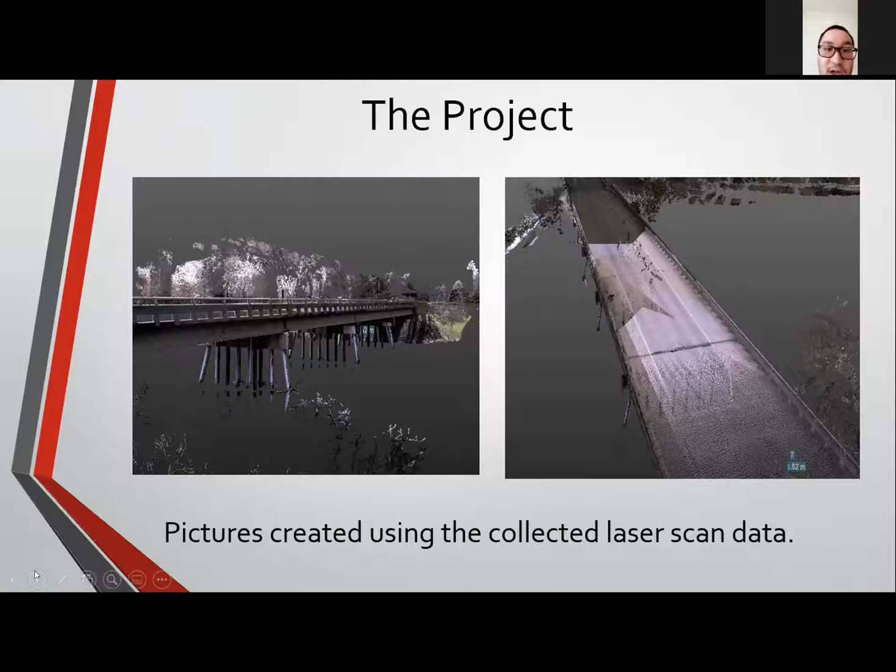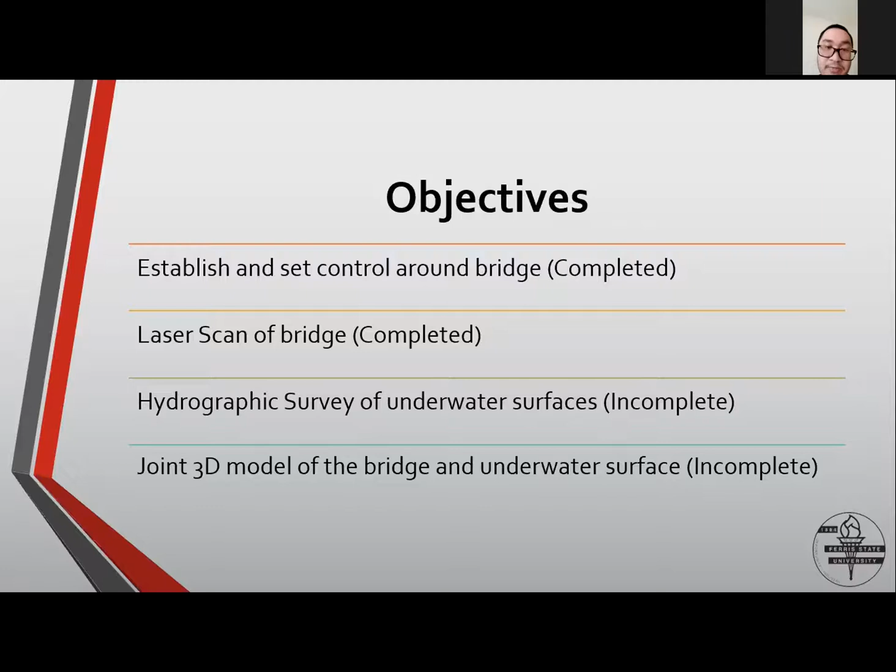For our original objectives, they were to establish and set control around the bridge, which we were able to complete. The laser scan of the bridge and all the surface areas that were above the water, which we were also able to complete. And then the other objectives were the hydrographic survey of underwater surfaces, which was left incomplete, but we did attempt. And then there was the joint 3D model of the bridge and the underwater surfaces, which was also left incomplete. Next slide, please.

Cost estimate. For the costs, we had the scanner fee for $5,000, the hydrone fee for $3,000, a professional surveyor fee for $500, labor fees, $1,440. Traveling cost was estimated to be $130. A processing fee of $650, and miscellaneous costs of up to $1,000, totaling to $11,720 total for estimated budget.

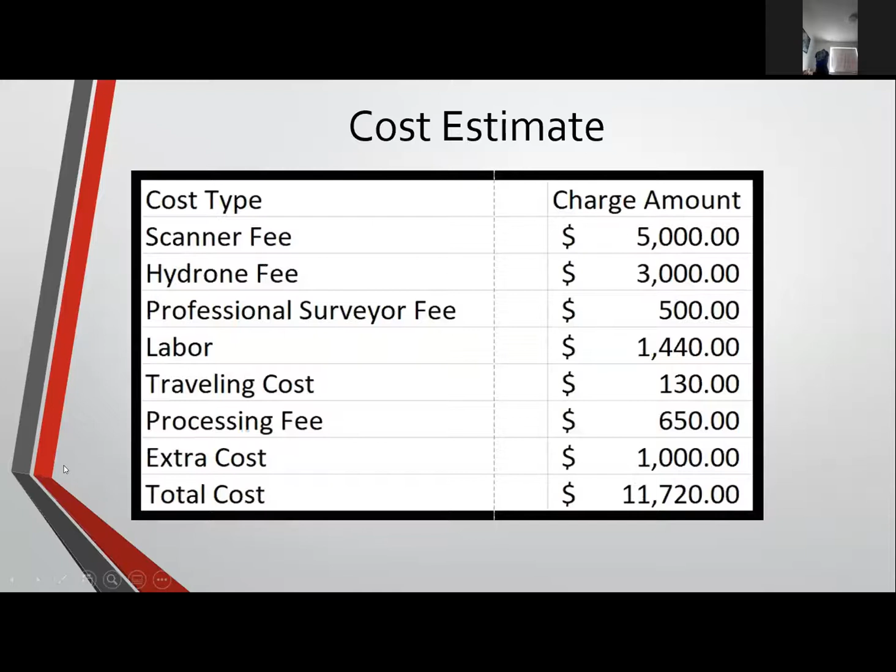If this were to be a real survey group and we were to have to pay for our own equipment, I believe that we were very well within our budget. So yeah, next slide, please.

Time allocation. For establishing control, we had 1 or 2 trips planned, and it took 2 trips to establish control. We first went out there to find where we wanted to place the points, and then to actually place the points. Scanning, we originally only had 3 trips planned, but because we were trying to learn the equipment and use it better and more efficiently, it actually took 5 trips to complete.

For hydrographic survey, we only planned for 1 trip using the hydrone, but that initial trip was unsuccessful due to multiple complications with the equipment and just unfortunate outcomes. And this was left incomplete due to the COVID-19 outbreak, and the 3D model could not be completed because we did not have access to the software or the underwater data.

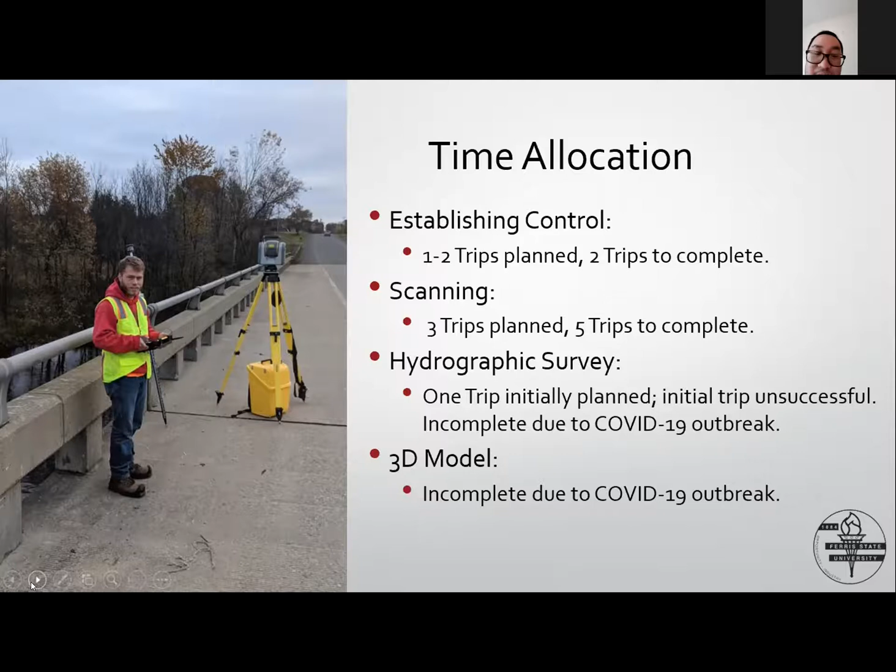So next slide, please. The first portion of the whole Capstone project was the scanning. We did a total of 10 scans. We used the Trimble SX10, and a tool that helped us along doing the project was a polygon tool. And the target that we used was the Trimble multi-track target. And we got it to be within a thousandth of a foot.

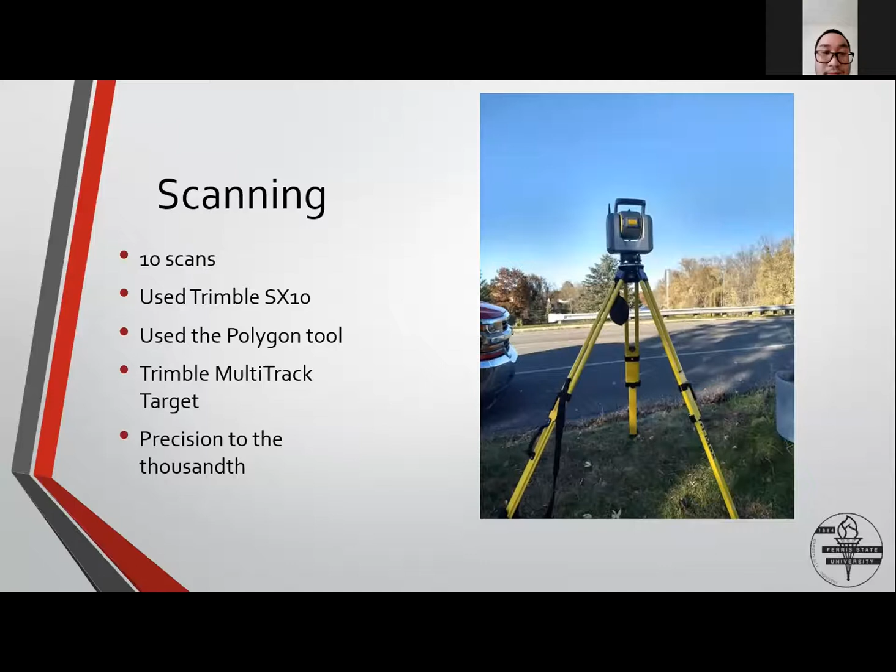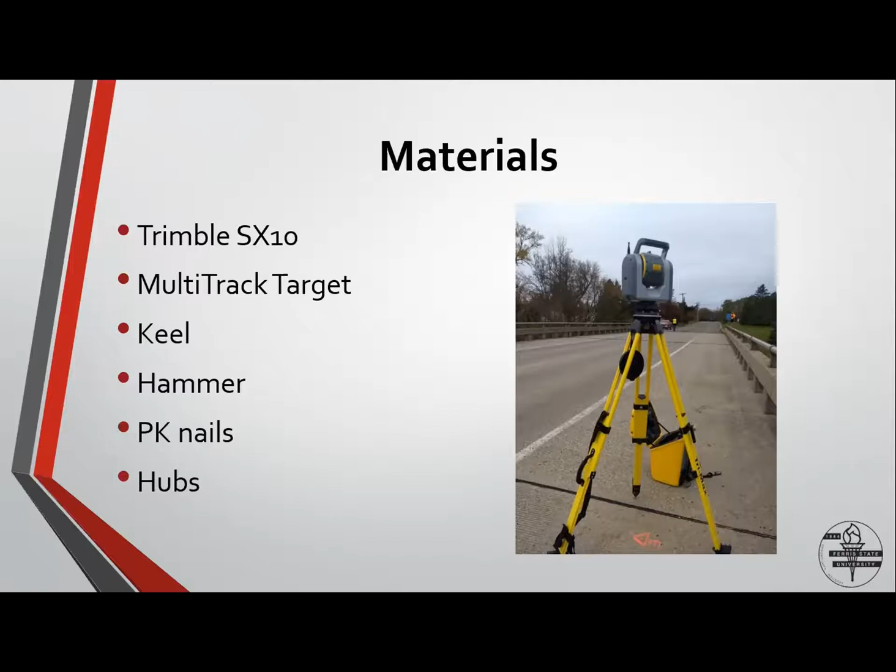The instruments was the Trimble SX10. The target that we used was the multi-track target. The materials that we used for the different control points were the keel, the hammer for the PK nails, and the hubs.

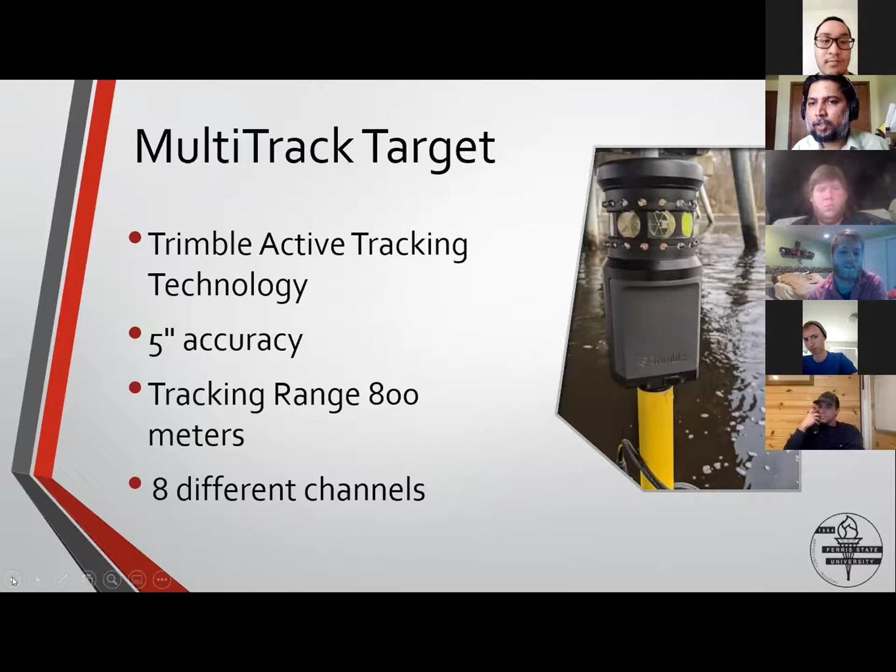Devon, wait a minute. David and everybody else, can you mute yourself and let only him speak. And when it's your turn, you can unmute yourself. Otherwise, there is a lot of background noise that is coming in.

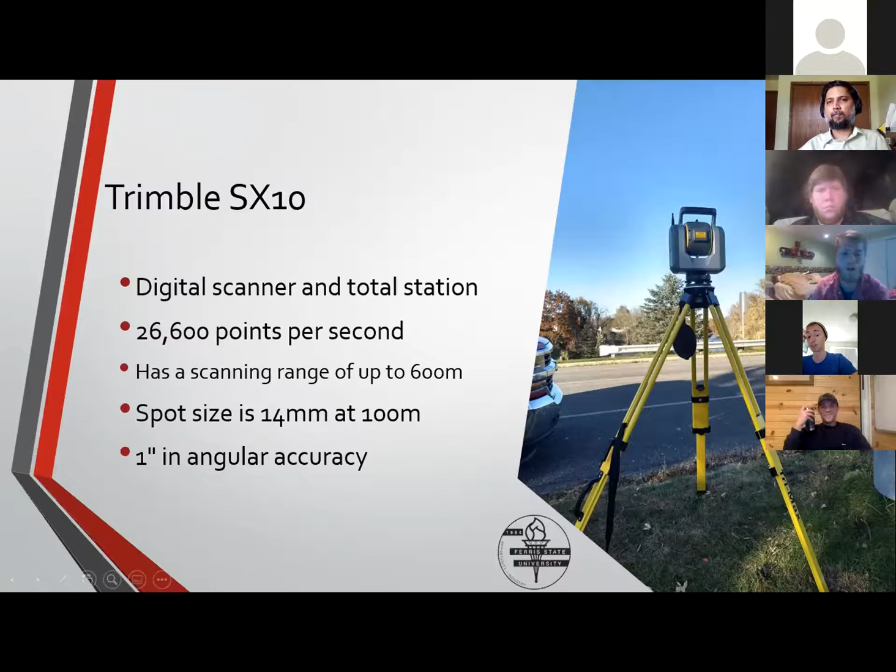You can carry on. All right, so the Trimble SX10, it's a digital scanner with a total station. It's capable of shooting points as fast as 26,600 points per second, and it can shoot points as far as 600 meters. And when you shoot a point at 100 meters distance, the spot size is 14 millimeters, and the angular accuracy is within like 1 second.

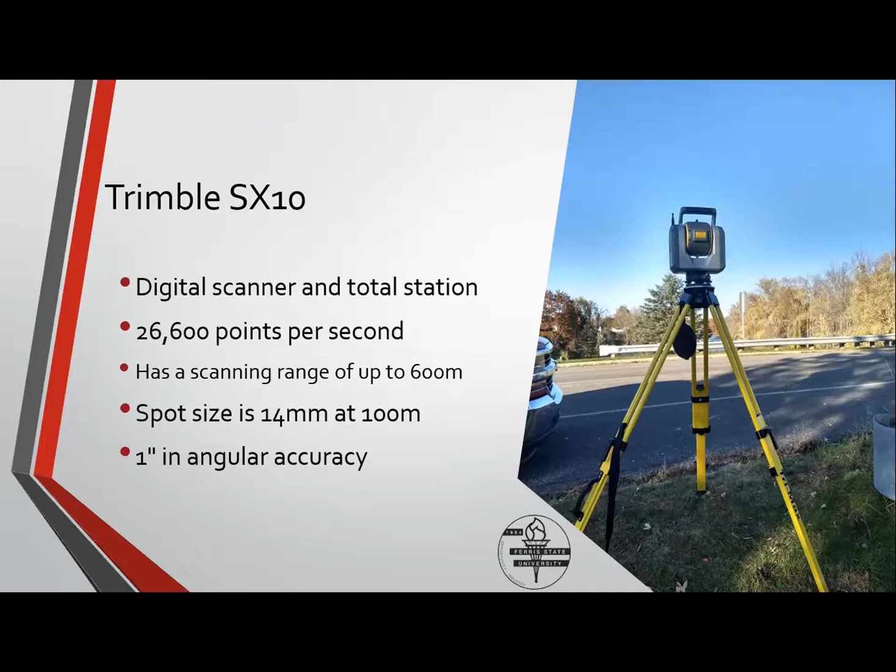It can be tracked as far as 800 meters, and it has 8 different channels, which is helpful when you're trying to use different instruments on the same target.

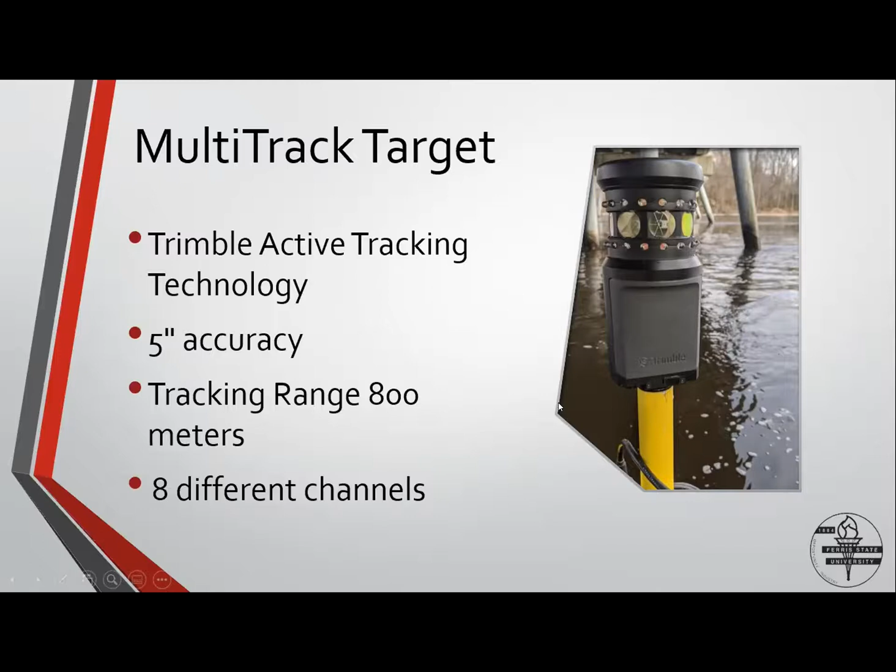Yeah, the next one. Okay, on the first day we set up control. We used 10 control points. I think we had like 2 or 3 on top, and then like 7 were on the bottom. We had to use a local coordinate system because the first total station could not reach that far, so we had to use the first point as 5,000, 5,000.

We had 10 scans on the top and the bottom of the bridge. On the first day, we did use the dome tool, but we decided that we got too much data, and it took almost an hour. So then we learned about the polygon tool, which lets us select the area of focus that we want to scan, which was very efficient. We use Trimble Business Center to process the data.

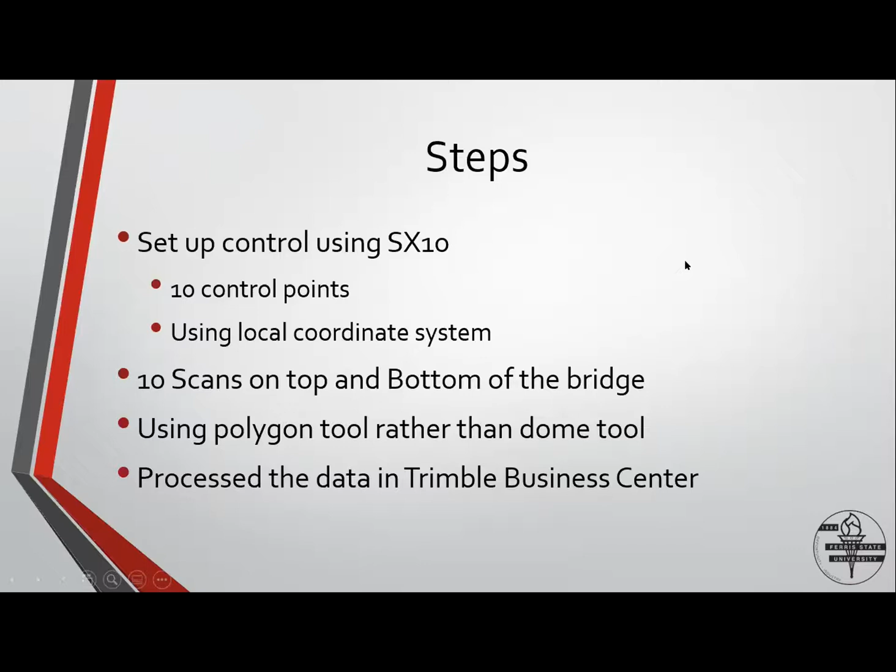Next one. The scanning for the control points, we had again 10 points, top and bottom. We used the hub and nail only on the first point when we had to set it in the ground when the ground was wet, because if you put a nail in, it very easily moves. So we used a hammer to hammer in the hub and nail.

PK nails we used in the pavement under the bridge, and the only time we used a keel was on the deck of the bridge, which was helpful because we couldn't use a nail in concrete.

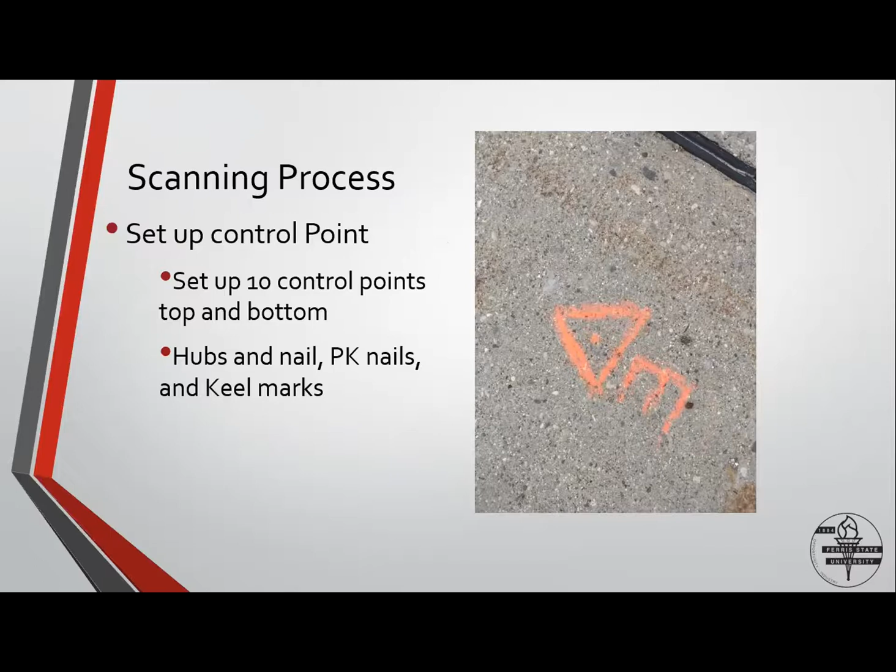For the data processing, we use Trimble Business Center. We use a point cloud for the model, but then we use images to color the points, so it overlays on the points, and then we planned to make a surface of the water bottom using a hydrographic survey if we completed it.

And then we use a point cloud for the 3D printing, but we were not able to create it because of the whole virus situation.

So the second phase of our project was the hydrographic survey of the riverbed surrounding the bridge. To accomplish this, we planned to use a hydrone. The hydrone was outfitted with a single beam sonar scanner, and both of those were provided to us by Mark Tenhove from Seiler Geospatial. Initially, we wanted to use a multi-beam scanner, but we couldn't get access to that, so we made do with a single beam scanner.

As the hydrone was out in the water, it was being tracked by a Trimble S5 total station set up on the bank of the river, and a prism was mounted on the hydrone itself. Because we were having connectivity issues with the controller for the hydrone and the hydrone itself, we tied a rope around it so that it didn't drift away, and someone stood on top of the bridge with the rope just in case the controller disconnected.

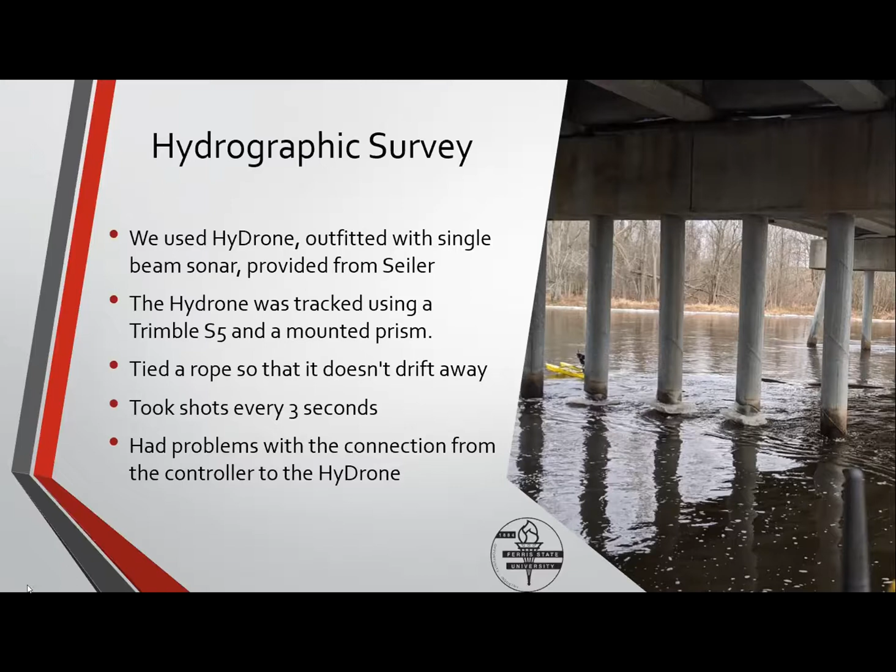We set up the hydrone to take shots every 3 seconds. We could have had it do more, but we decided that was good for what we needed. So here's the hydrone. It was manufactured by Seafloor Systems. It's got 2 floating sections connected by an aluminum frame. Each section has its own propeller, each controlled independently by the controller, which is how you steer it.

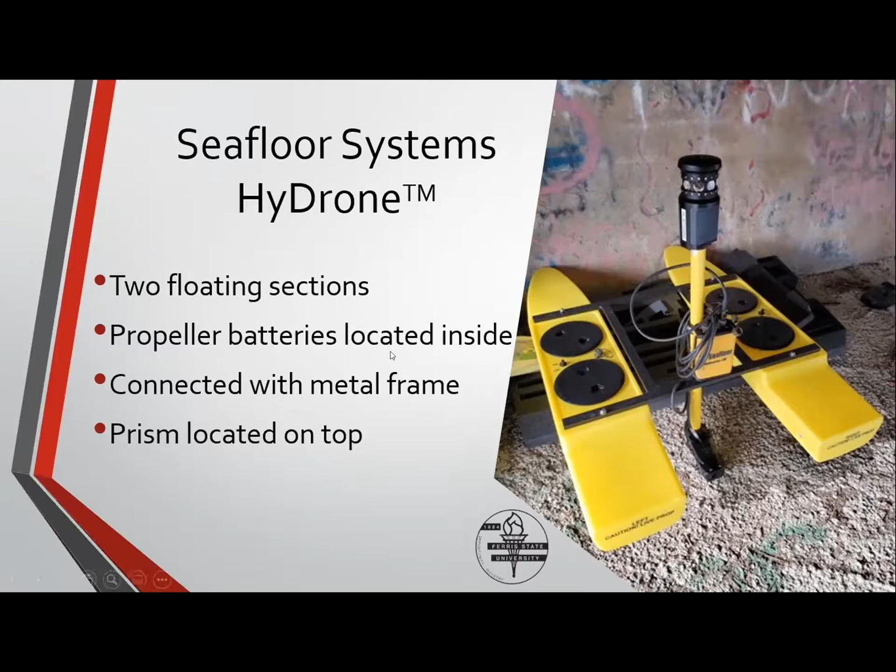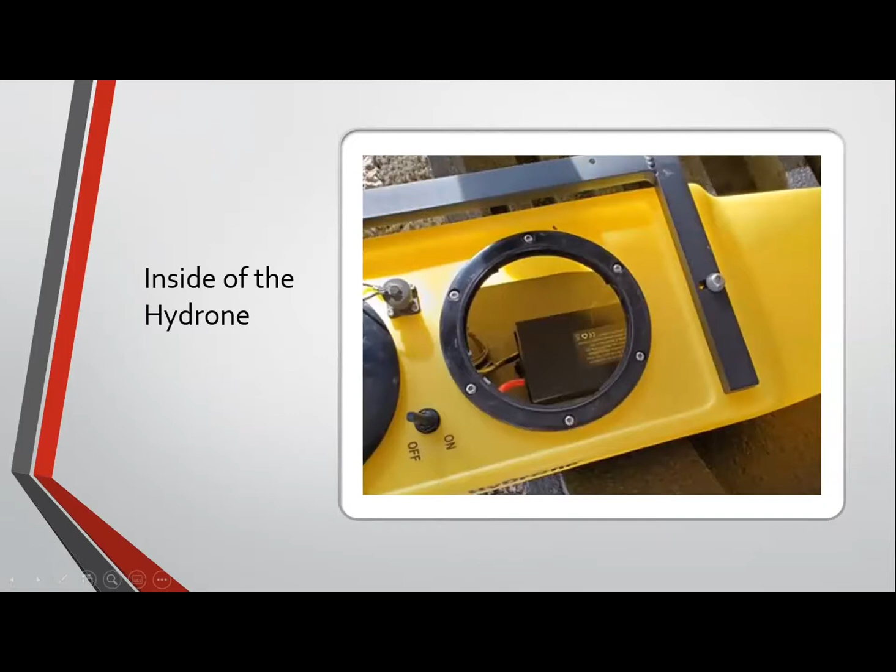To process the hydrographic data, we were going to use Trimble RealWorks to create a digital elevation model from the sonar data we collected. And then we were going to merge that model with our bridge scan to create one uniform model.

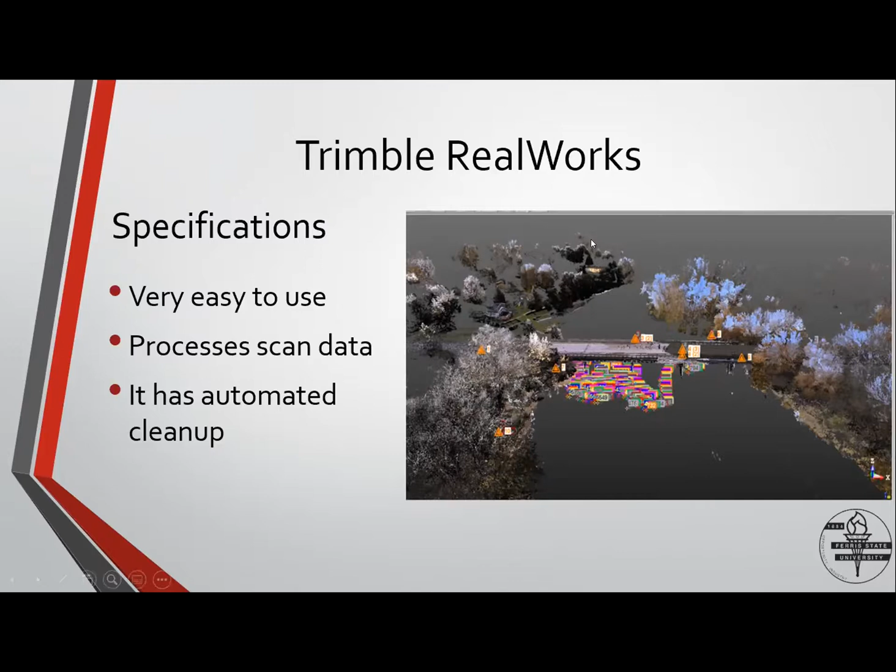Trimble RealWorks, use that to process the 3D scanner data.

I feel like I'm missing a slide here.

Maybe not. Okay, so after we created the model in Trimble Business Center and Trimble RealWorks, we were going to make a 3D print of the whole model. To create the model to print from the point clouds that we had, we were going to use MeshLab. It's a free software used to create 3D printable surfaces from point cloud data.

Our first attempt at creating a 3D printable model, we used the Poisson filter. Initially that failed, and we were unable to make another attempt due to the COVID-19 virus. If we were able to create a 3D printable model, we were going to use the 3D printers located in the plastics building.

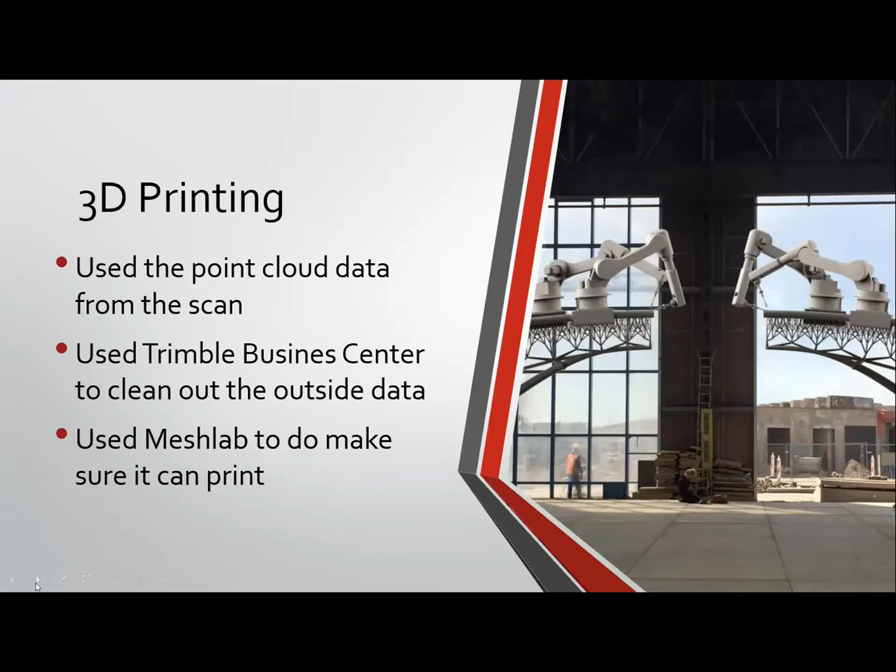Yeah. Okay, Dave? Uh-oh. Did I? Okay, so completed tasks. Did you all hear that? Well, yeah, I just had to remember to unmute my... No, what's that?

So, completed tasks. What we've gotten done so far, we managed to set up control, and we're able to get the bridge scanned from six different angles to get above and below the bridge from different directions. We attempted a hydrographic survey, but that was unsuccessful, and due to the shutdown, we were unable to go back out and do another survey.

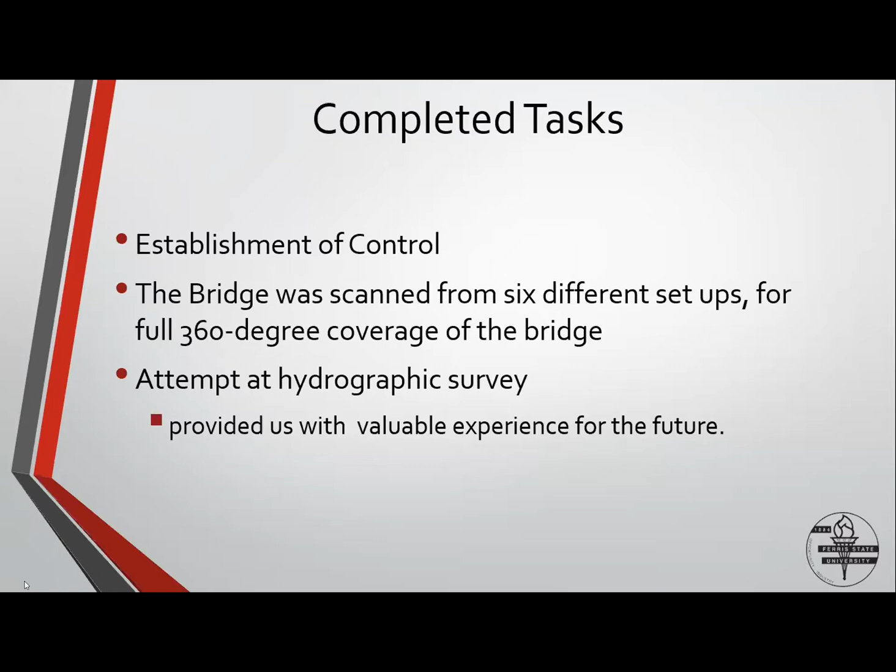So unsuccessful tasks, as already mentioned, we were not able to do the hydrographic survey. Also, we wanted to create a 3D model and then print it with a 3D printer, and we are also not able to access the facilities we needed for that due to the shutdown.

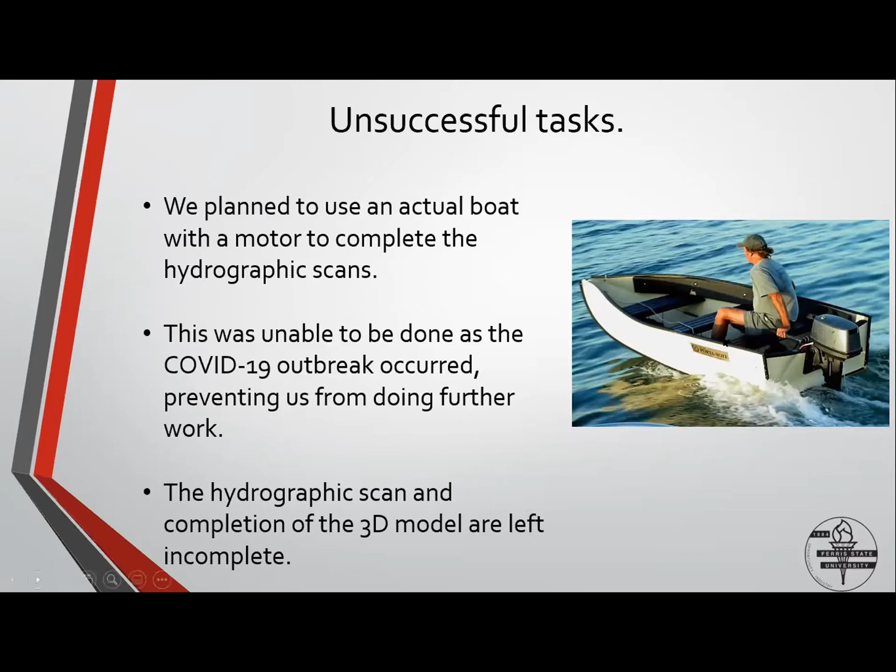Conflicts. Some of the conflicts we had to deal with was, one of them, we set the instrument up at different heights, and that caused our measurements to be out of sync with each other, and we didn't know how to work the equipment to adjust it so that they meshed up. And that created a lot of time loss right there.

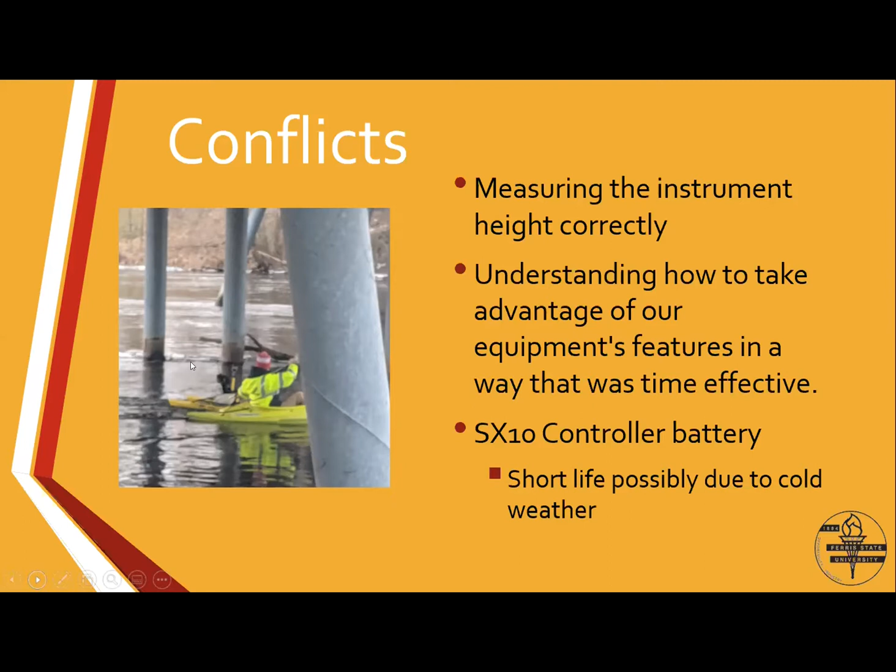And then understanding basically how to use the equipment, like how to set the projects up when we got out to the sites, that took a lot of extra time because we're just learning the equipment at the time. Another thing that we had a problem with was the SX10 controller battery had a short lifespan, we think it's probably due to the cold weather, but we're not 100% sure on that.

Also, we had a problem with the Hydrone. Its controller was not responding to the drone, and so we kept losing signal. So we attempted to control the drone with a rope attached to it, but that ended up tangling up in the propellers and making it so we lost control of it, and it ended up being caught in some brush, so we had to have friends come out and rescue the drone from the pile of brush out in the middle of the river.

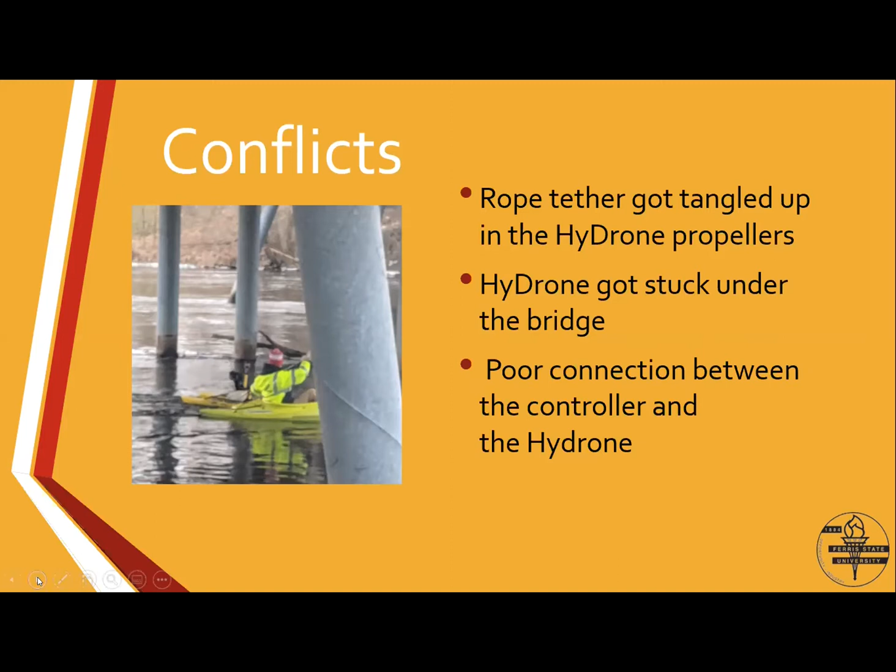COVID-19 was a serious problem for our group. We had a lot of things that we wanted to still do, all our finish-up work, and we suddenly had to figure out how we could work to get around different things. We did a lot of over the web sharing, but there's limitations when you don't have facilities and labs where you can go to use software. So yeah, we were unable to get the 3D model created and printed because of that.

Acknowledgements. For our project, we were supplied with equipment through Ferris State University and Seiler Geospatial. They provided us with the SX10 scanner and total station. Seiler Geospatial also provided us with a Hydrone that we used when we tried to do the hydrographic survey.

Individual acknowledgements. Mark Tenhove, geospatial survey salesman for Seiler, provided us with the Hydrone, and he also came out and assisted us in the operation of it. He also provided us access to Trimble RealWorks and Trimble Business Center.

Tim Dyer, he had a kayak, so when he heard that our drone had got stuck, he came out with the kayak and he rescued the Hydrone. John Feisey also came out and assisted in the rescue operation of the Hydrone.